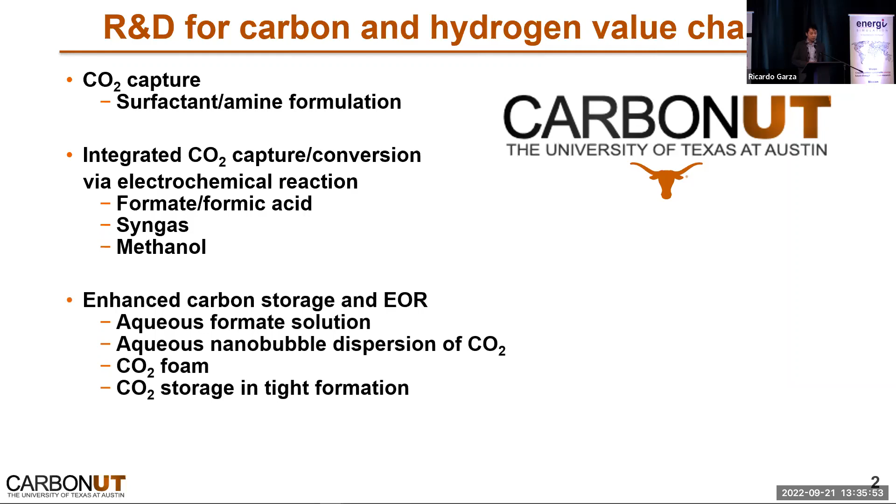EOR and enhanced carbon storage - we have two main topics here. The first one is aqueous formate solution. We are proposing to use formate as a carbon carrier that can dissolve in water, so we can make a carbon bearing water to inject the carbon into the formation as water flooding.

The second idea is to make a nanobubble dispersion of CO2 in the water. This is another way to transport and store CO2 in the aqueous phase. Just recently, we were able to make a stable nanobubble dispersion of CO2 in brines. Today I'm going to discuss some details of the aqueous formate solution topic.

Here you can also see CO2 storage in tight formation. We have Sofian in the audience - he's one of our PhD students working on this topic, and he has a poster on tight formation transport phenomena.

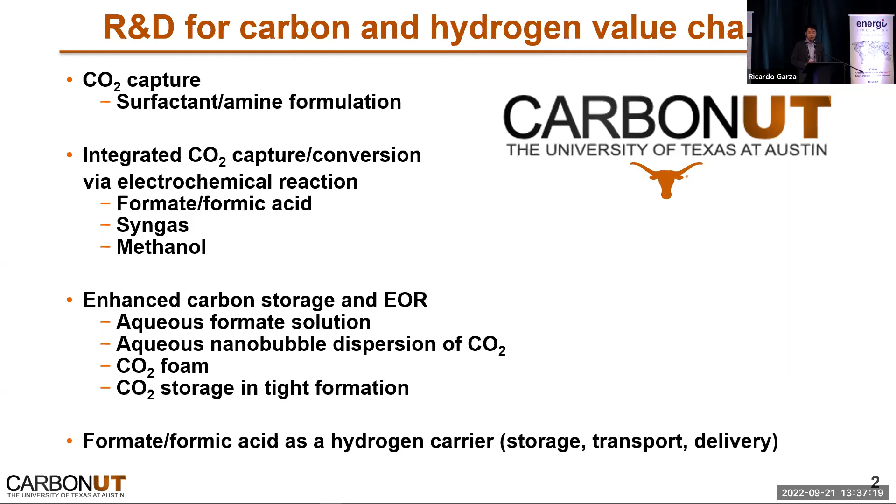Lastly, we have the hydrogen related topic. So we are looking at formate or formic acid as a hydrogen carrier for geological carbon storage of hydrogen and transport and delivery to hydrogen fuel cell.

I'm going to start with this schematic of carbon balance in oil production and carbon storage. Carbon balance here means carbon out and carbon in through the boundary of surface and subsurface. CO2 generated from different industrial processes is captured and compressed, because it has to keep high carbon density for transportation purpose, and injected into the formation for carbon sequestration and enhanced oil recovery.

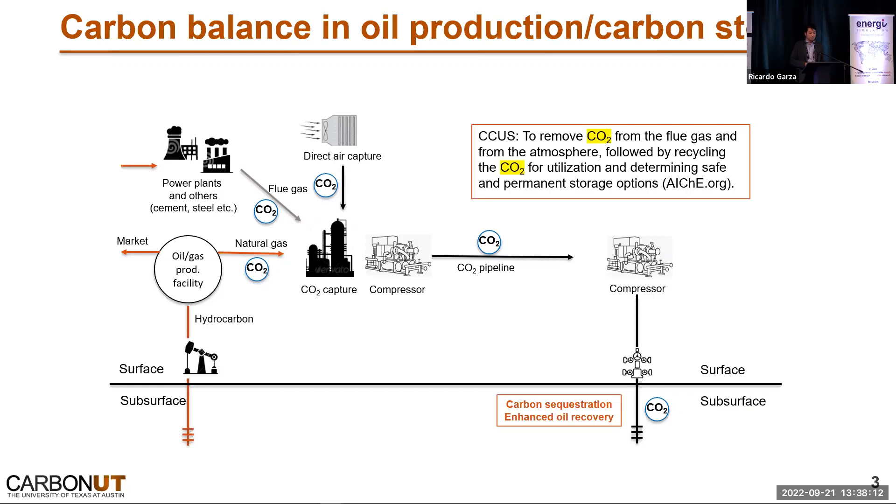Now, the C in CCUS stands for actually carbon, not CO2. So the question we had at the beginning of the program was: what other carbon species can we use for enhanced carbon storage compared to CO2? This question came because it's not an easy task to make this carbon balance in oil production and the CO2 storage process.

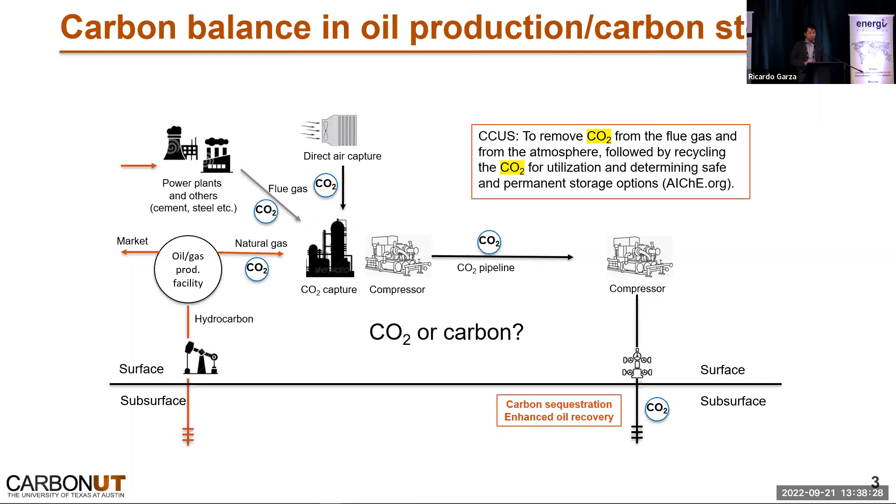So here I'm showing a carbon density of oil, using pentane as the example oil on the left-hand side and the CO2 carbon density on the right-hand side. Suppose we have a formation pressure and temperature of 10 megapascal and 75 degrees Celsius. The production of 1 liter of oil results in 40 moles of CO2 emission. If we use CO2 as a carbon carrier and store the carbon as CO2 in the same pore space of 1 liter, that pore space can contain only 5 moles of CO2. So it's not an easy task to make a carbon balance using CO2.

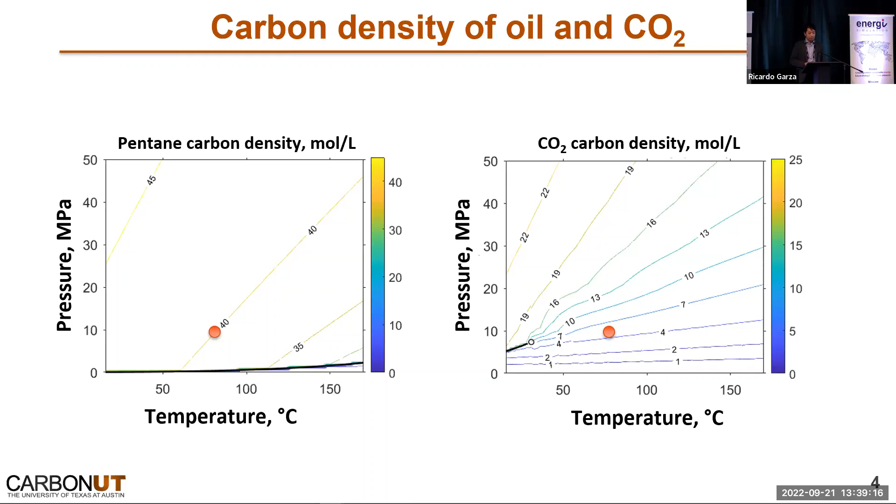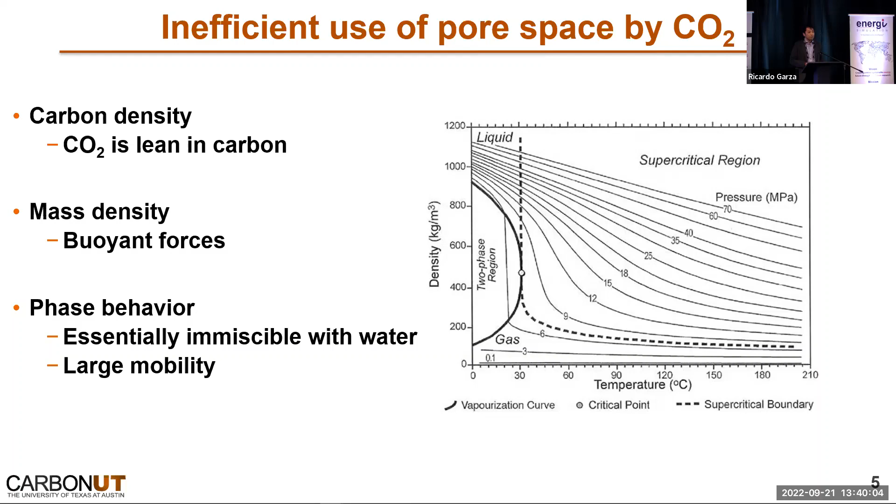So we increase pressure, or we store CO2 in a deep formation so that the density of CO2 is high. However, the density of CO2 is much smaller than liquids such as formation water and oil. That results in buoyancy driven upward flux of CO2 that leads to potential leak of CO2 to the surface. Also, CO2 displacement of water is not efficient because it's an immiscible multi-phase flow displacement with very small viscosity compared to the water being displaced. All these factors collectively reduce the efficiency of pore space utilization by CO2.

So we look at different species, and we are particularly interested in formate, which is a conjugate base of formic acid.

Formic acid is widely studied as a hydrogen carrier, and we are looking at formate for geological applications. In a typical formation pH environment, formate is the species present. When pH is lower, like a 2, it becomes formic acid.

Formate is very stable, and we are proposing this as a hydrogen carrier and carbon carrier that dissolves in water. Also, this viscosifies the solution, so it can stabilize the displacement fronts. Formate by itself can be a hydrogen carrier and also a raw material for different carbon species.

The conversion of captured CO2 into formate or formic acid can be done by electrochemical reaction, and this technology is currently rated as TRL 6.

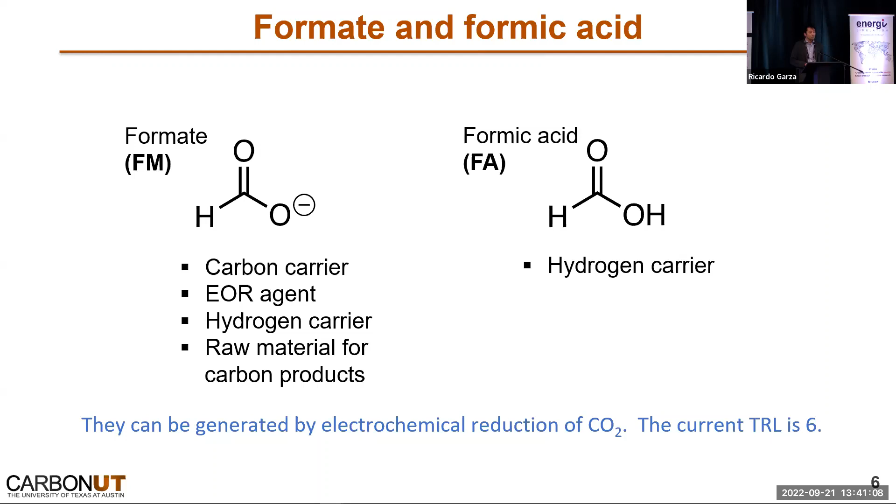Using formate, the previous schematic can be modified this way. First we are doing R&D for an integrated system of CO2 capture and reduction into different species. For the subsurface application, we are particularly interested in formate.

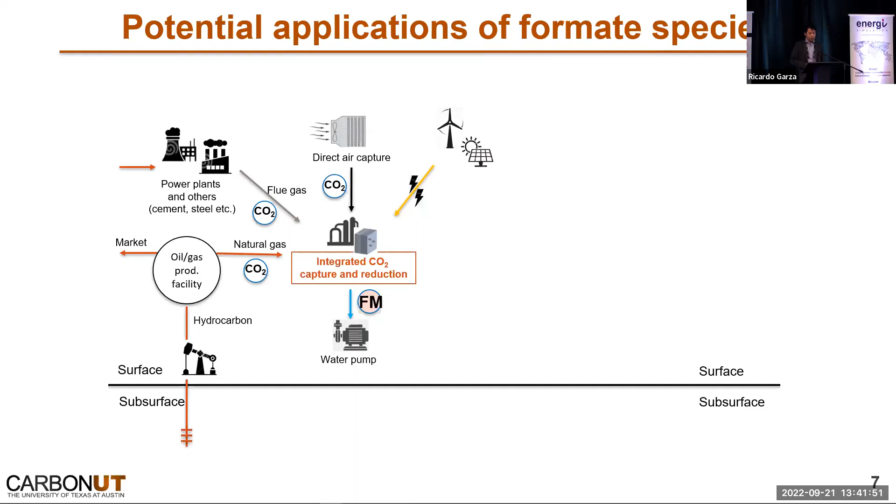If this process is done by renewable energies, the proton taken from the water to make formate is green hydrogen, basically. FM stands for formate, which dissolves in water at high concentration, so we don't have to use a gaseous species for this process from this point on.

So no CO2 from that capturing point. It's transported using the aqueous phase and injected just like water flooding. Carbon sequestration, EOR, and storage of renewable energy are possible with formate.

Using this integrated system of CO2 capture and conversion, we can come up with a hypothetical value chain of hydrogen. Here FA stands for formic acid. It can be transported to a location of hydrogen consumption, and dehydrogenation results in hydrogen gas.

This can be at very high pressure for hydrogen fuel cells, and that also gives us CO2. This CO2 can be converted back to formic acid using renewable energy, using the same process. You can find a local generation-consumption process of hydrogen.

In this consortium, we are studying this integrated system of CO2 capture, reduction, and also surface processes in a box as part of the program. So I'm going to focus on subsurface application of formate.

We look at formate because it's highly soluble in water, so we can make a carbon-bearing water with high carbon density. Here I'm showing a snapshot of a solubility test of formate, in this case in DI water at room temperature, but we tested at different conditions.

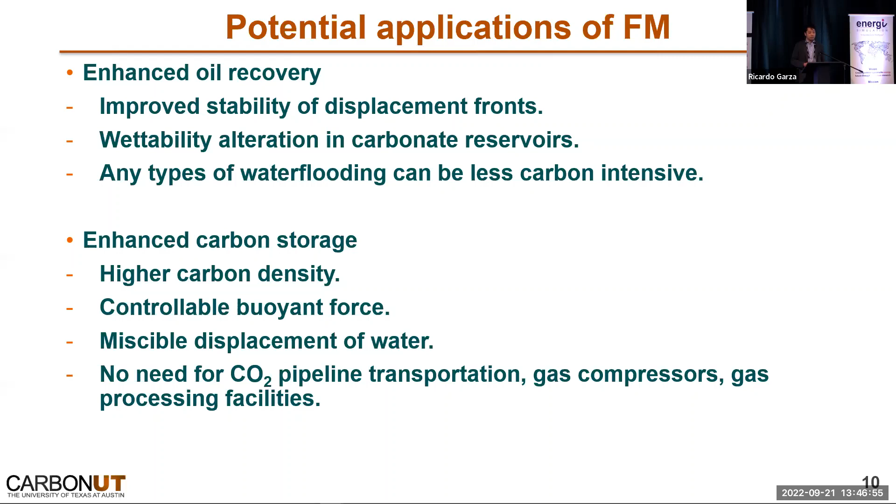To show the subsurface flow regimes of the formate solution process, I'm going to show simulation case studies. The case was taken from SPE10, a very heterogeneous model with fracture networks. Initial and production well pressures are 1500 psia. For the CO2 case, to be compared with the formate case, the MMP is 1460 psi, so the CO2 case is said to be a miscible process. We use the CMG GEM simulator with the Peng-Robinson equation of state.

We assume 5 years of water flooding followed by EOR and carbon storage using either CO2 or formate solution. The formate case has a viscosity of 5 centipoise at 30 weight percent, and we assume a constant CO2 rate of 5 tons per day for the 5-spot pattern.

The main difference between the two cases comes from the endpoint mobility ratio. Since the injectant is displacing oil and water, the endpoint mobility is very important. The CO2 case has an endpoint mobility ratio of 13 for oil displacement and 3 for water displacement, so they are not stable. With the formate solution, the endpoint mobility ratio is 0.2 for oil displacement, and miscible displacement of formation water has a viscosity ratio of 0.13. So it's much more stable than the CO2 case.

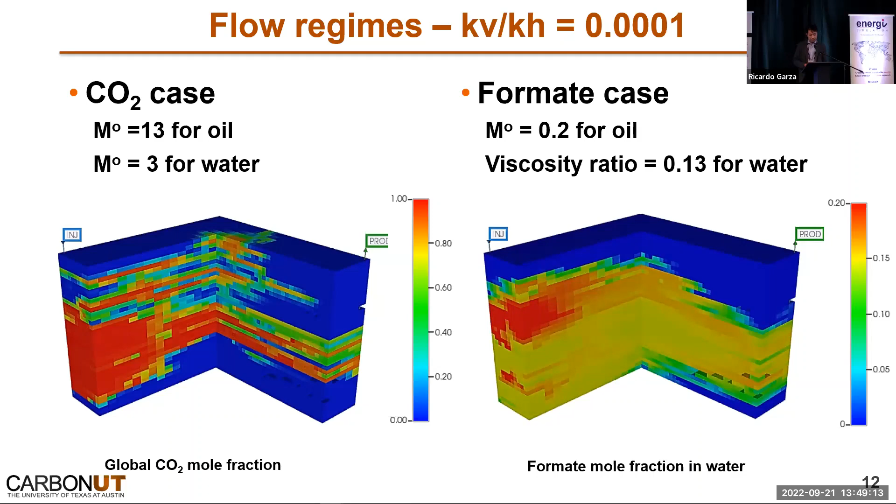After water flooding for 5 years, CO2 is injected but rapidly breaks through the fracture network. After breakthrough, the displacement becomes very inefficient, and you see accumulation of CO2 near the ceiling. The formate case is much more stable in displacing oil and water. After breakthrough, it continues to displace the oil and water, and there's no carbon accumulation near the ceiling because of the density of the injectant. This insensitivity of displacement efficiency to breakthrough time is a significant advantage of formate over CO2, because it mitigates the risk of subsurface uncertainty.

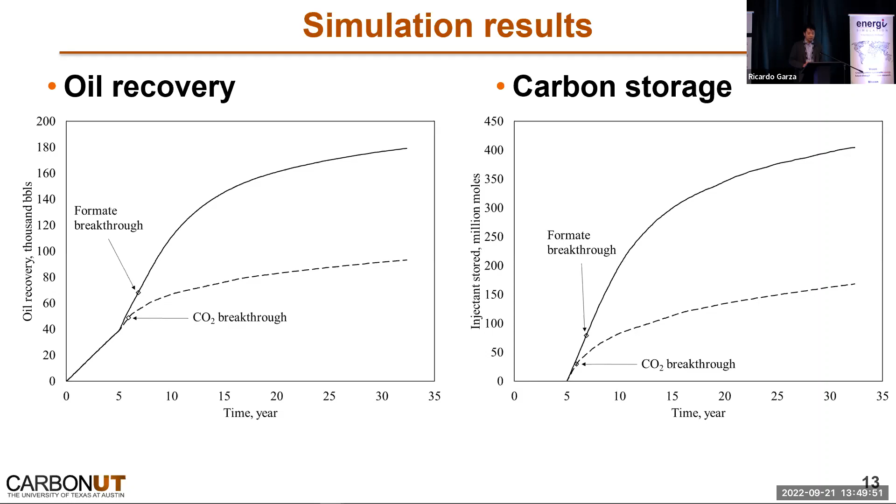This is the summary result. On the left-hand side you see oil recovery, and on the right-hand side you see carbon storage for the two cases. The CO2 case rapidly levels off after breakthrough, while the formate case continues to increase oil production and carbon storage after breakthrough. That's a good advantage over CO2. So we discussed that formate can stabilize the displacement front, resulting in enhanced carbon storage while increasing oil production.

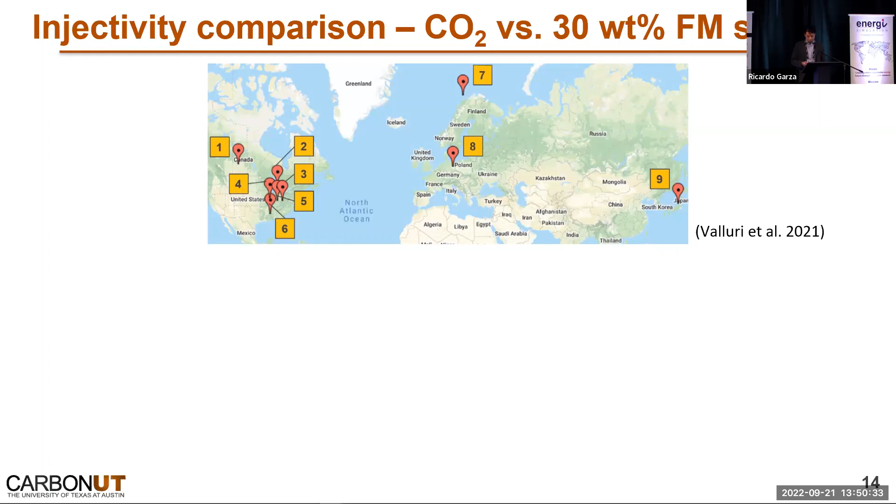Another point to discuss is injectivity, because we are injecting carbon-bearing water, and injectivity of CO2 may be much greater. So we studied this paper by Valluri et al., 2021. They studied 9 aquifer CCS projects, and out of 9, 7 cases had enough information for us to compare CO2 and the 30% formate solution in terms of carbon injectivity. I'm listing their permeability, depth, pressure, and wellhead pressure as reported in the paper for their CO2 CCS projects.

On the rightmost two columns you see CO2 density in different units, at bottom hole temperature and pressure as reported in the paper. Out of the 7 cases listed, 6 cases have very high CO2 density. This is understandable because aquifer CCS is good for high pressure, so CO2 has high density. The one exception is this Ketzin project, project 8, which makes the analysis very interesting.

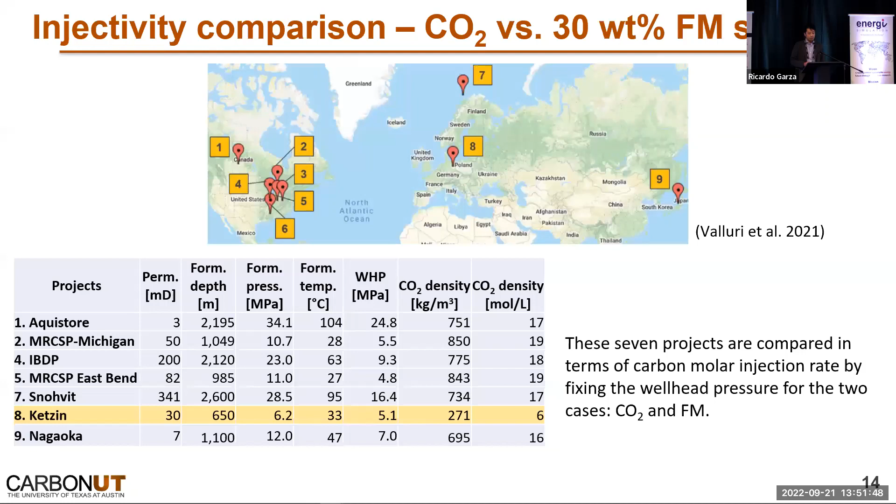So we are going to compare the two cases, CO2 injection and 30 weight percent formate solution injection, for the same wellhead pressure across the 7 cases to see which one results in greater carbon injectivity. Here's the result: the vertical axis is the molar injectivity of CO2, basically the molar injection rate of CO2 divided by the molar injection rate of carbon with the formate solution. This is called the carbon injectivity ratio.

If this number on the y-axis is below 1, then the formate case results in a greater carbon injection rate compared to CO2. The horizontal axis is the CO2 density at bottom hole conditions. 6 cases here have high CO2 density, therefore CO2 is more favorable, advantageous over formate in terms of carbon injection rate. But this Ketzin project results in the formate case being more favorable. So our analysis indicates that an important factor is the bottom hole temperature and pressure.

So we increased the wellhead pressure for the Ketzin project from the original 5 megapascal to the hypothetical wellhead pressure of 10 megapascal to see what happens to the carbon injectivity ratio. And we confirmed it actually increased the carbon injectivity ratio to 8 from the original 0.5.

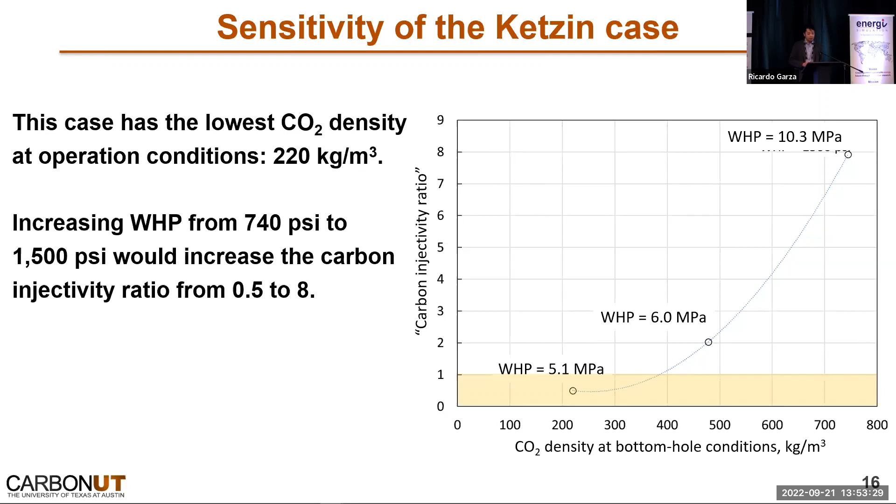So our current understanding is that formate case results in greater carbon injection rate when CO2 density at the bottom condition is below 400 kilogram per cubic meter.

So that indicates the best condition for CO2 injection and the best condition for formate injection are different. So they don't compete for the same location. That opened up a new opportunity of carbon storage locations.

So this is the last slide. We presented formate as a new carbon carrier that is highly soluble in water and brine, and that can contain high carbon density even at low pressure. And it viscosifies the solution, and we confirmed this with wettability alteration with carbonate.

The formate solution is a promising carbon carrier for enhanced carbon storage and EOR, primarily because it stabilizes the front of displacement. Formate is advantageous over CO2 in terms of carbon density and carbon injection rate at conditions below which CO2 density is less than 9 mole per liter.

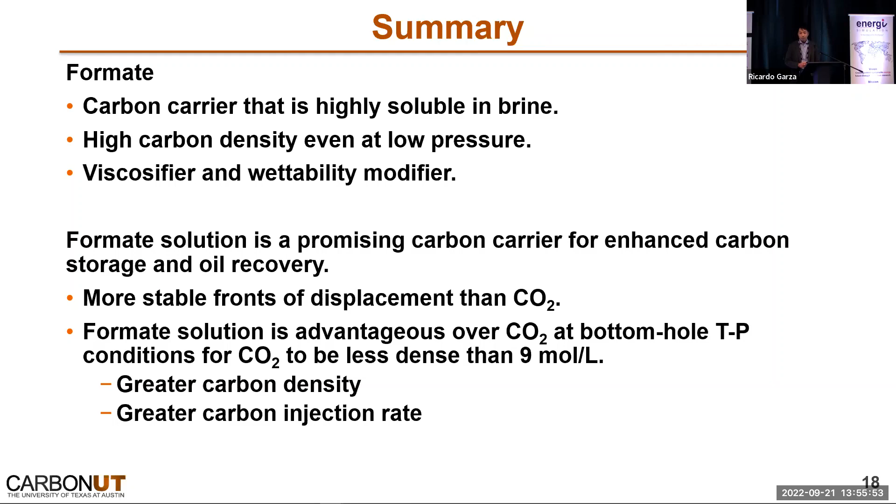Right, yeah, formate is in the solution. Yes, in the solution. So it's an ion.

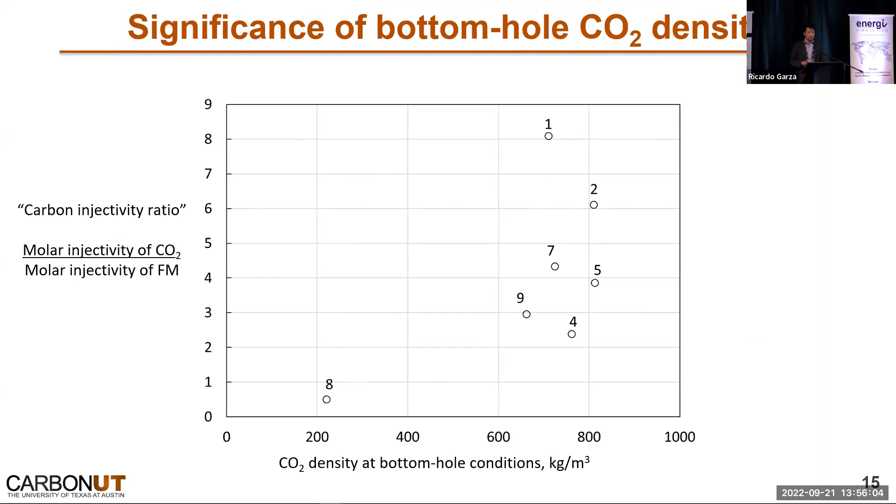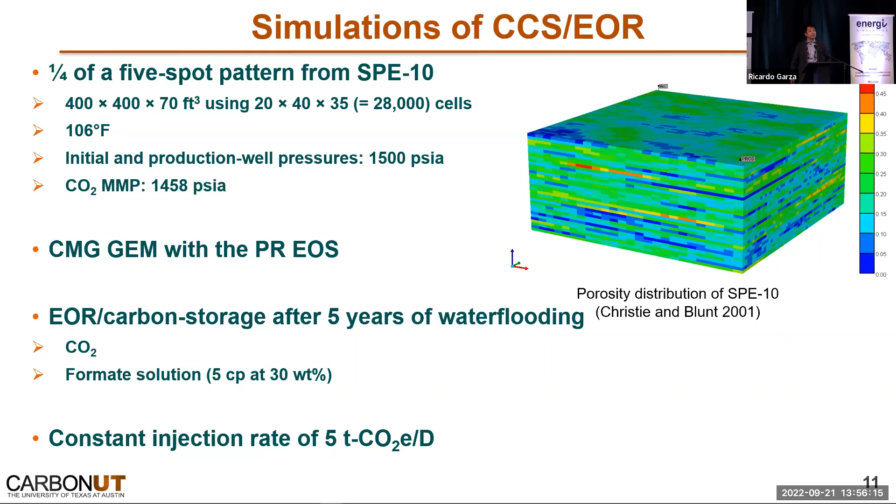Yes, Hadi, thanks a lot, that was very, very interesting. How would this hydrogen carrier compare with piping and other liquid hydrogen, for example, transportation? What's the scale of it? When is it economic to go this way?

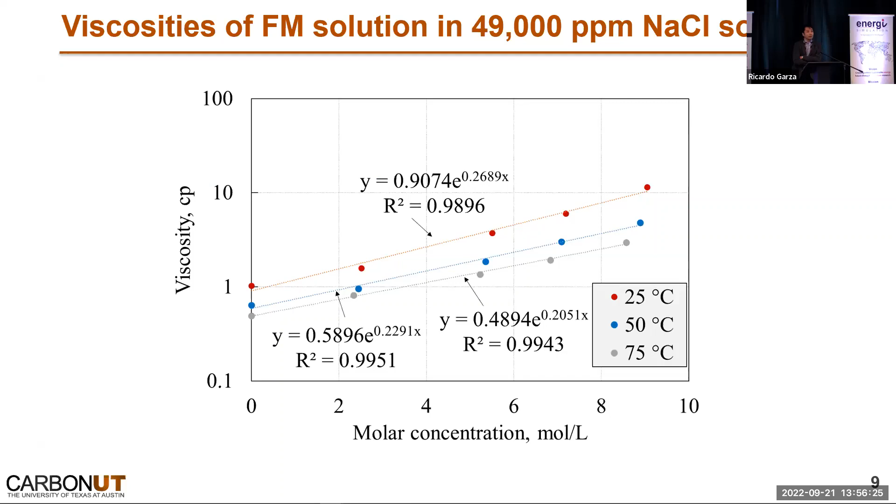Oh, I see, yeah, that's a great question. We really want to do economic analysis of that value chain. The key idea is, we are ultimately looking at green hydrogen. Instead of splitting water, our hypothesis is that overall, if we make formic acid and then transport, store, and deliver using this liquid form of hydrogen carrier, perhaps that might be more advantageous over using hydrogen gas all the way from water splitting and transport. So we wouldn't see hydrogen until the delivery point, because the proton taken from water is in the form of formic acid, and we don't see hydrogen gas until the delivery point. So the transportation would be convenient in this form.

But it's still hypothetical, so we want to study the economics of it.

Great, I have a question myself. You use endpoint saturation as well as viscosity to adjust the mobility for your modeling. So in terms of additional parameters that you may need to do some lab studies on, what may they be?

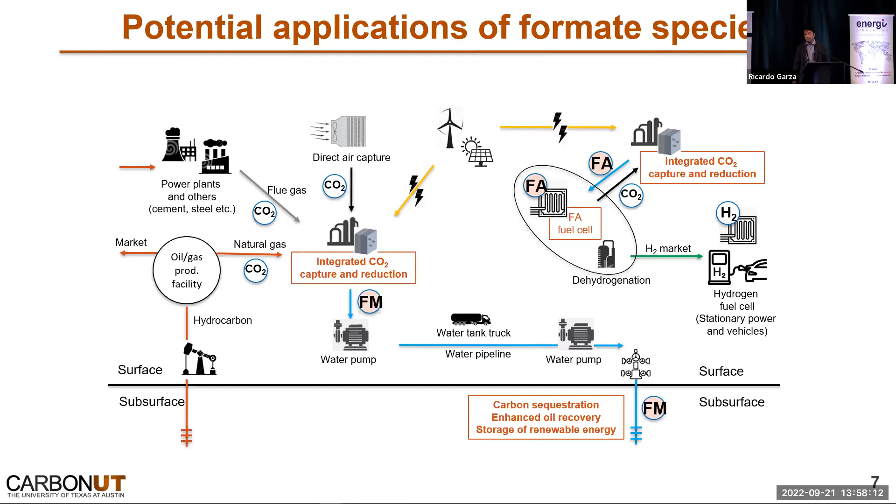Yes, that's a great question. So we are exploring many parameters of this high concentration formate solution: viscosity, IFT, at a wider range of temperatures, and solubility. Once we find good correlations, I believe simulation is much more straightforward than experiment, after getting physical properties. Certainly with the support of UT Austin's computer programs, you can easily build that in once you get the lab work done.

Yes. So second stage would be then, are you planning any pilots? And if so, when do you think you can get a pilot going? Right, yeah, so we are discussing a pilot test with several companies, and perhaps the first step is to see the long-term stability of formate by just using a single well. It's like a single well tracer test, but that way we can confirm the formate long-term stability in actual subsurface conditions, and that's the current plan.